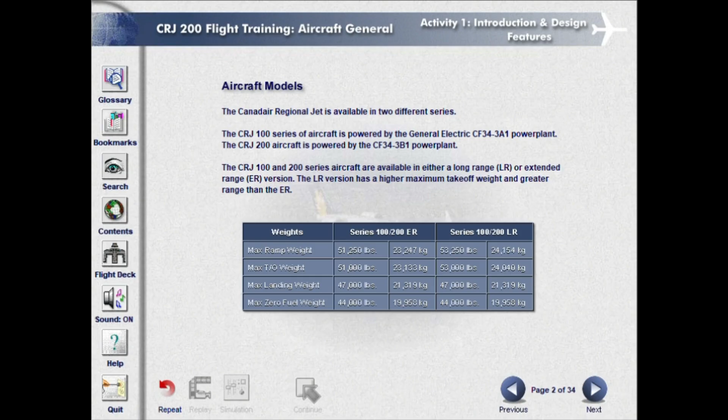Aircraft performance. The CRJ is capable of maintaining a cruise speed of up to 0.81 Mach. The aircraft's maximum operating altitude is 41,000 feet. Maximum operating range is specific to the aircraft model. For example, the 200 LR aircraft with 50 passengers on board is capable of ranges up to 2,005 nautical miles (nm) when flown at a normal cruise speed of 0.74 Mach. The 200 ER aircraft, when operated under identical conditions, has a range of 1,645 nautical miles.

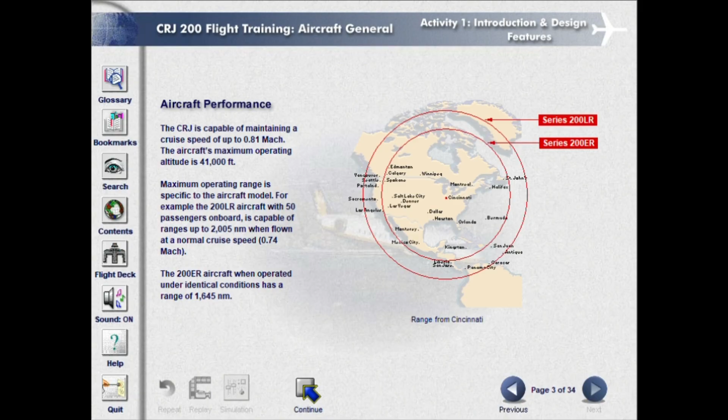Noise and exhaust levels. The Canadair Regional Jet easily meets the most stringent of the FAA's rating system for aircraft noise as defined by FAR Part 36 Stage 3 requirements. Exceptionally quiet during takeoff and landing, the CRJ has allowed a number of airlines to extend their operating hours at some airports. The engines are highly efficient and clean burning, which leads to very low exhaust emissions and lower fuel consumption.

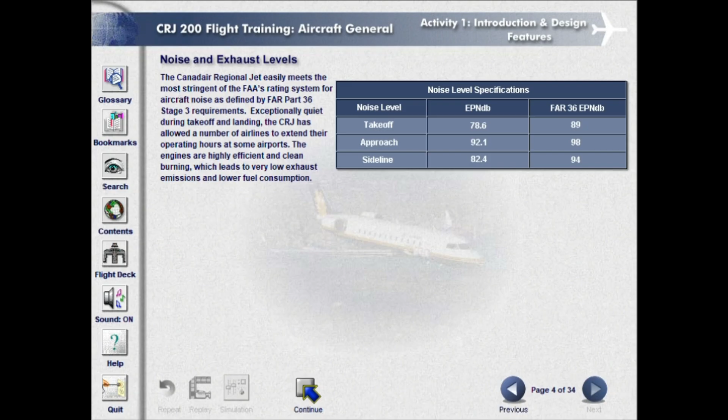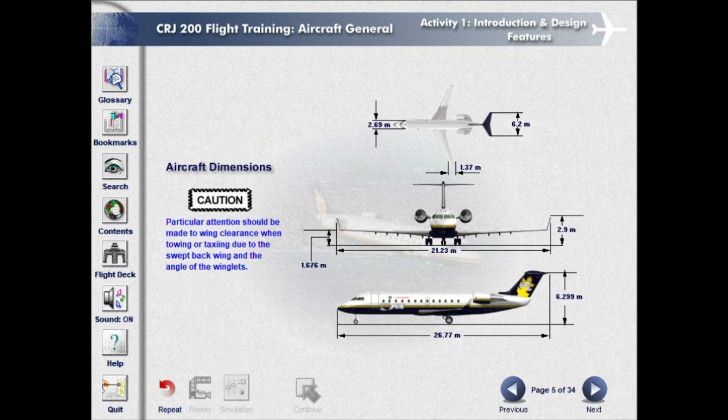Aircraft construction. Many different types of material are used in the construction of the Canadair Regional Jet. While still considered an all-metal aircraft, composite materials play an important role in the aircraft construction. High-strength aluminum alloys are used throughout the primary structure. In areas that require exceptional strength, titanium is used. Advanced composite materials, including Kevlar and graphite epoxy, are used extensively in areas such as fairings, servicing doors, and secondary structures.

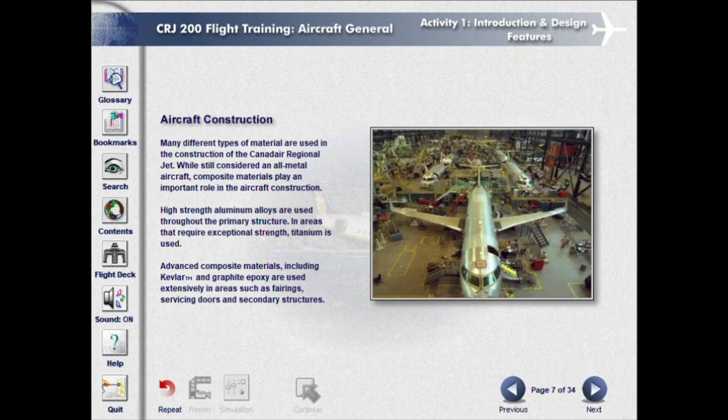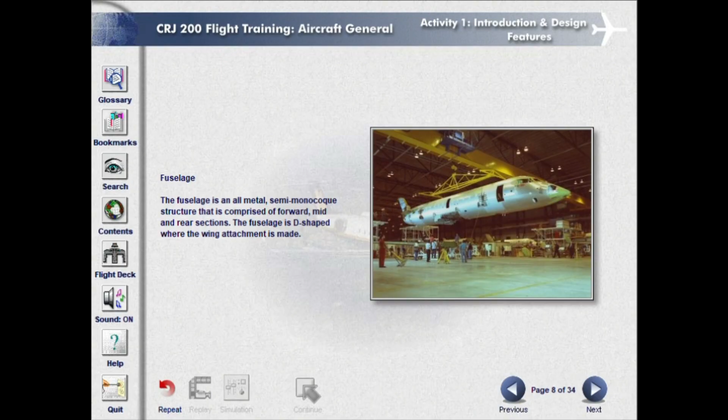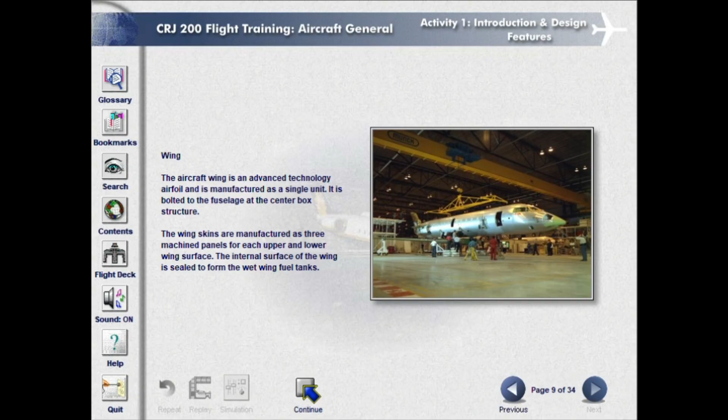Fuselage. The fuselage is an all-metal semi-monocoque structure that is comprised of forward, mid, and rear sections. The fuselage is D-shaped where the wing attachment is made. Wing. The aircraft wing is an advanced technology airfoil and is manufactured as a single unit. It is bolted to the fuselage at the center box structure. The wing skins are manufactured as 3 machined panels for each upper and lower wing surface. The internal surface of the wing is sealed to form the wet wing fuel tanks.

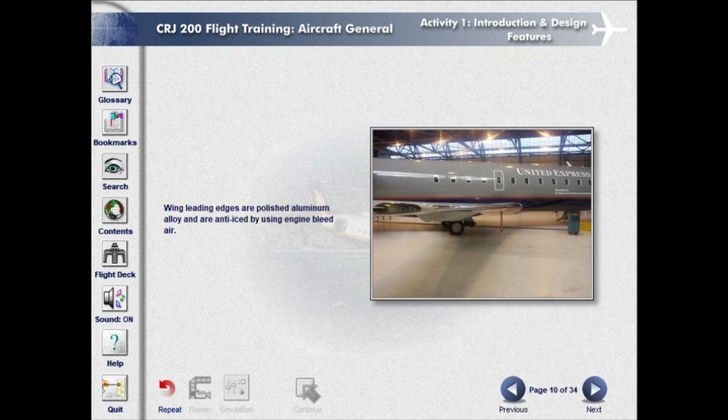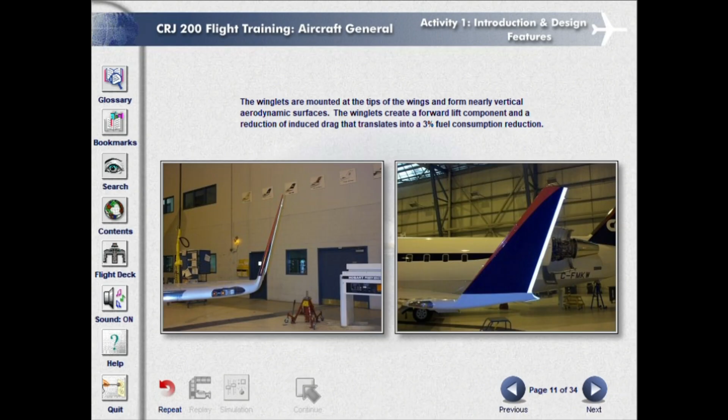Wing leading edges are polished aluminum alloy and are anti-iced by using engine bleed air. The winglets are mounted at the tips of the wings and form nearly vertical aerodynamic surfaces. The winglets create a forward lift component and a reduction of induced drag that translates into a 3% fuel consumption reduction. Empennage. The T-tailed empennage consists of a vertical stabilizer, elevators, rudder, and a fully movable horizontal stabilizer. Leading edges of the swept-back vertical and horizontal stabilizers are constructed of polished aluminum alloy.

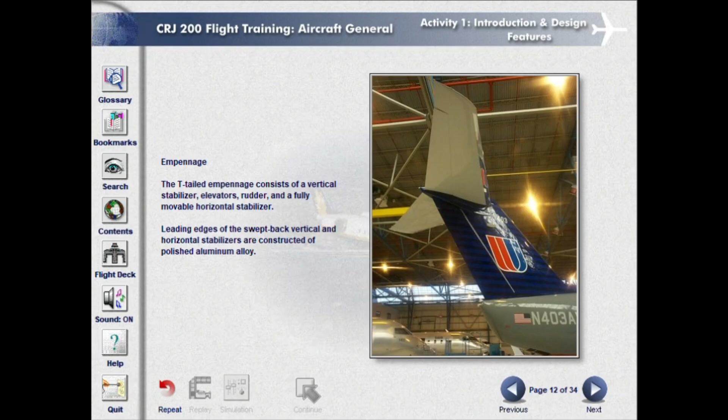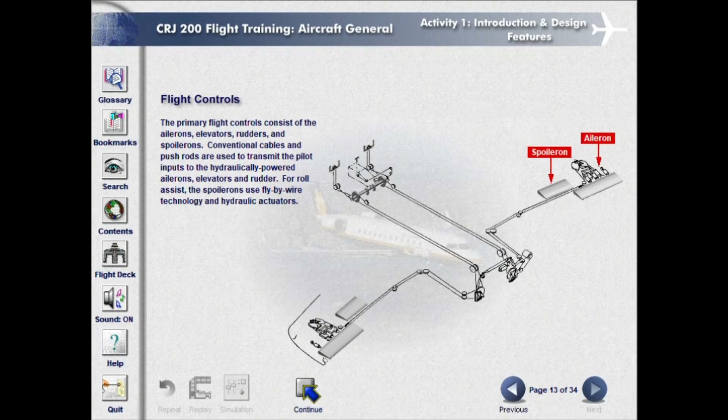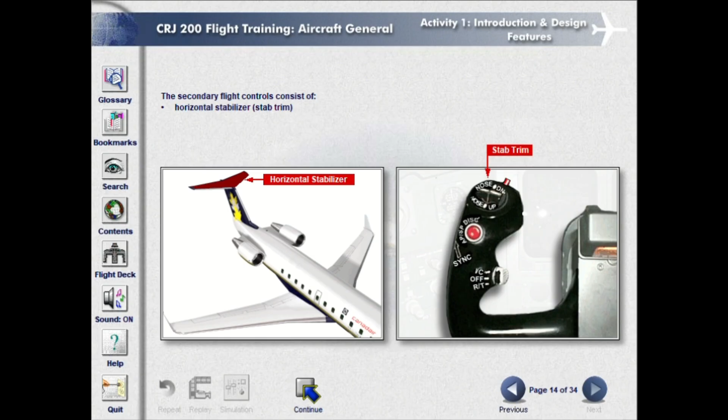Flight controls. The primary flight controls consist of the ailerons, elevators, rudder, and spoilerons. Conventional cables and push rods are used to transmit the pilot inputs to the hydraulically powered ailerons, elevators, and rudder. For roll assist, the spoilerons use fly-by-wire technology and hydraulic actuators. The secondary flight controls consist of horizontal stabilizer trim, aileron and rudder trim, flaps, flight spoilers, and ground spoilers.

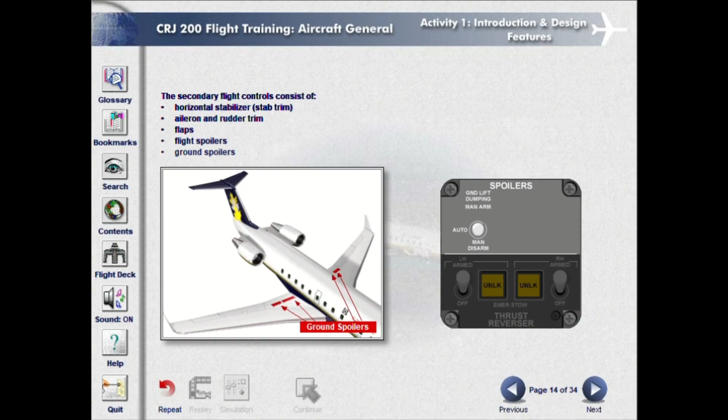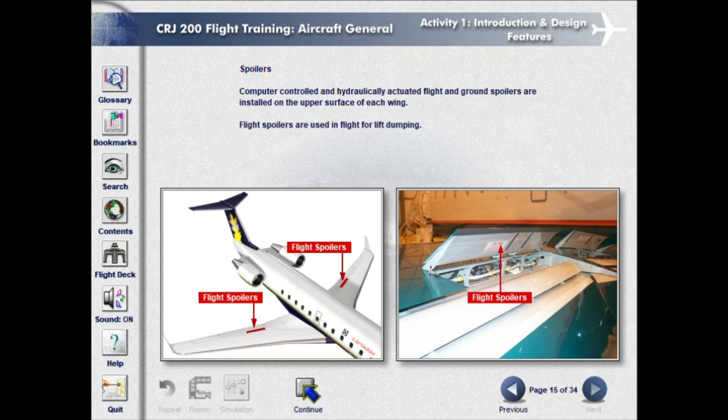Spoilers. Computer-controlled and hydraulically actuated flight and ground spoilers are installed on the upper surface of each wing. Flight spoilers are used in flight for lift dumping. The ground spoilers are major components of the ground lift dumping system. The ground spoilers, flight spoilers, and spoilerons are automatically deployed during a rejected takeoff or on landing to assist in aircraft braking.

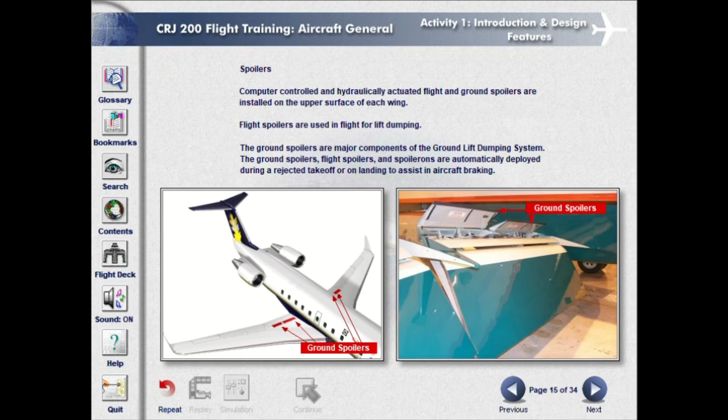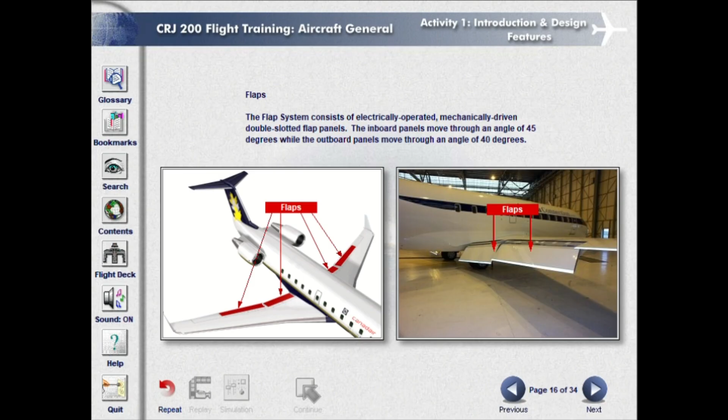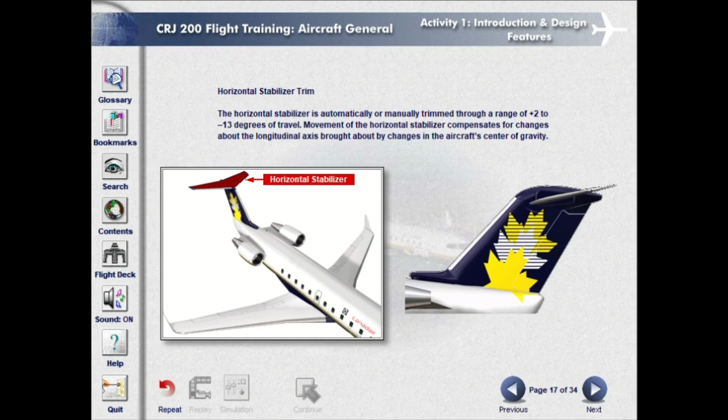Flaps. The flap system consists of electrically operated, mechanically driven, double-slotted flap panels. The inboard panels move through an angle of 45 degrees, while the outboard panels move through an angle of 40 degrees. Horizontal stabilizer trim. The horizontal stabilizer is automatically or manually trimmed through a range of +2 to -13 degrees of travel. Movement of the horizontal stabilizer compensates for changes about the longitudinal axis brought about by changes in the aircraft's center of gravity. Aileron and rudder trim. To change the neutral position of the control surfaces, electrical motors reposition the aileron or rudder control cables.

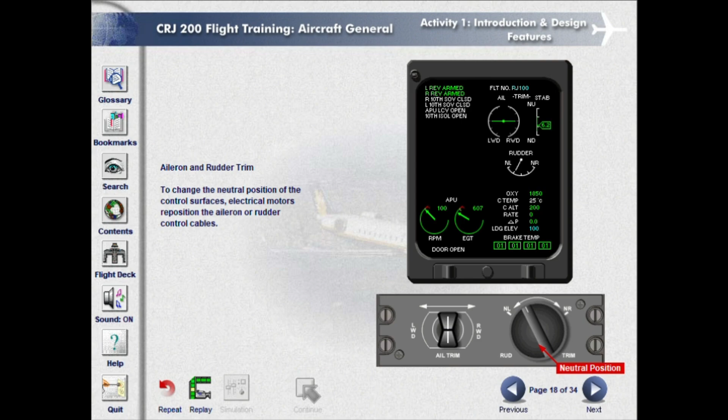Landing gear. The landing gear is electronically controlled and hydraulically actuated. Main landing gear, or MLG. The dual-wheel main landing gear is a trailing link style of gear with nitrogen-charged shock struts. Hydraulic actuators are used to extend and retract the main landing gear.

The gear retracts inward into the main gear bays. When retracted, the wheels are enclosed inside a protective wheel bin and sealed by an aerodynamic brush seal. Each main gear is equipped with temperature-monitored and anti-skid protected steel brakes.

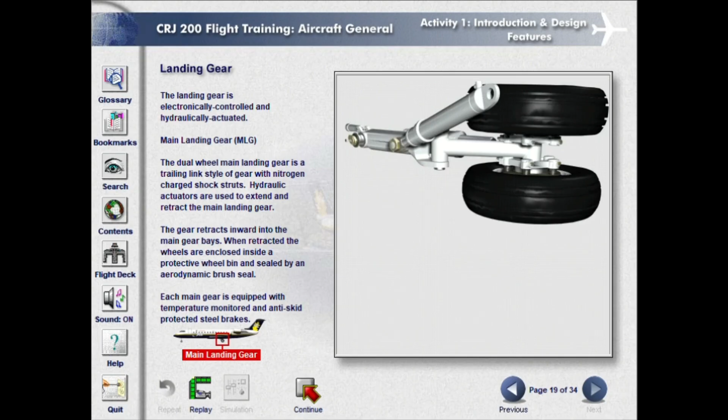Nose landing gear. The nose landing gear is a dual-wheeled assembly with an over-centering downlock and conventional shock strut. The nose gear retracts forward into the nose gear bay. When retracted, the gear is fully enclosed by a pair of hydraulically operated doors.

Nose wheel steering uses steer-by-wire technology. Steering tiller or rudder pedal inputs generate electrical signals to hydraulically turn the nose wheels.

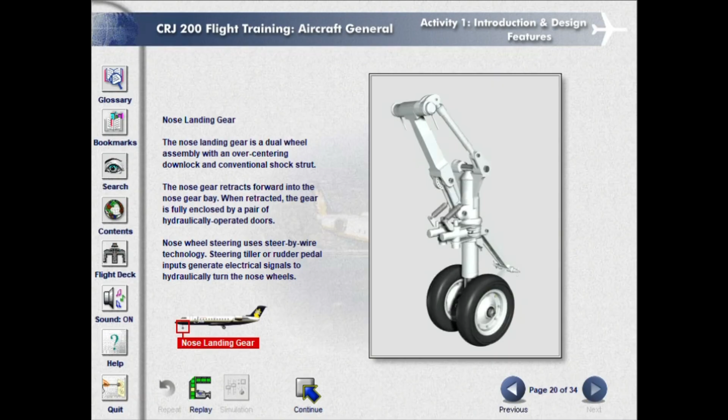CF-34 power plant. The aircraft is equipped with two fuselage-mounted General Electric CF-34-3A1 or 3B1 high-bypass turbofan engines. The CF-34-3A1 and 3B1 engines are identical in appearance and operation. The 3B1 model has been modified internally to provide better flat-rated power availability and lower fuel consumption.

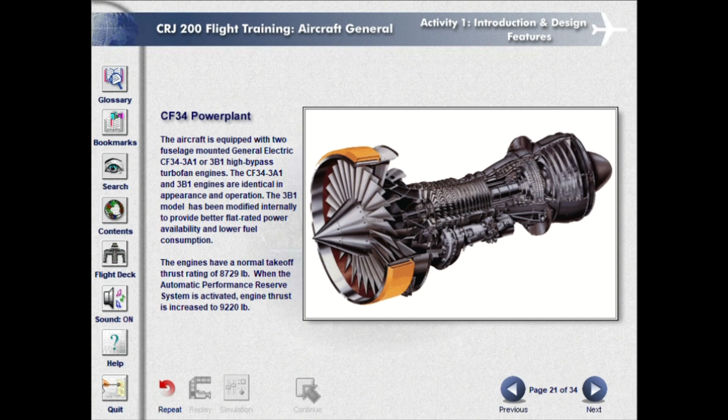The engines have a normal takeoff thrust rating of 8,729 pounds. When the automatic performance reserve system is activated, engine thrust is increased to 9,220 pounds. Lightweight clamshell cowlings provide maintenance personnel with quick and easy access to the engine.

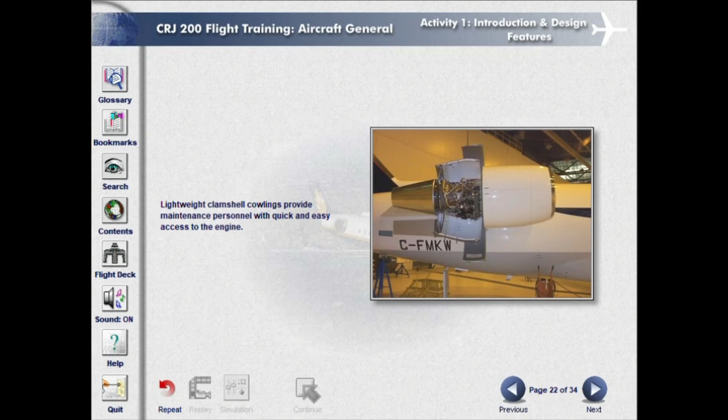Engine major assemblies. The CF-34 power plant is comprised of the N1 and N2 sections. The N1 section consists of a single-stage fan and is driven by a 4-stage low-pressure turbine assembly. The N1 fan generates 80% of the thrust at takeoff. Fan discharge air can be reversed during an aborted takeoff or on landing to assist in stopping.

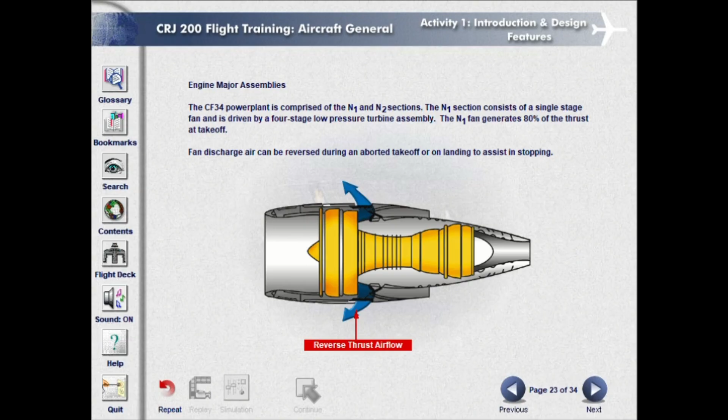Engine services. In addition to producing thrust, the engines provide AC electrical power, bleed air, and hydraulic power to operate various aircraft systems. A 30 kVA AC generator and a mechanically driven hydraulic pump are mounted on the accessory gearbox of each engine. 10th and 14th stage compressor bleed air is used to power pneumatically operated systems.

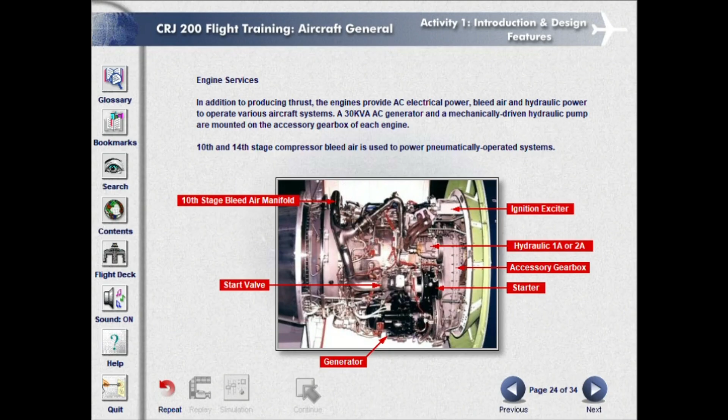Ground handling servicing points. The location of the ramp servicing points permits quick aircraft turnaround. Most of the service locations are on the right side of the aircraft. This configuration allows boarding and deplaning of passengers while servicing is carried out.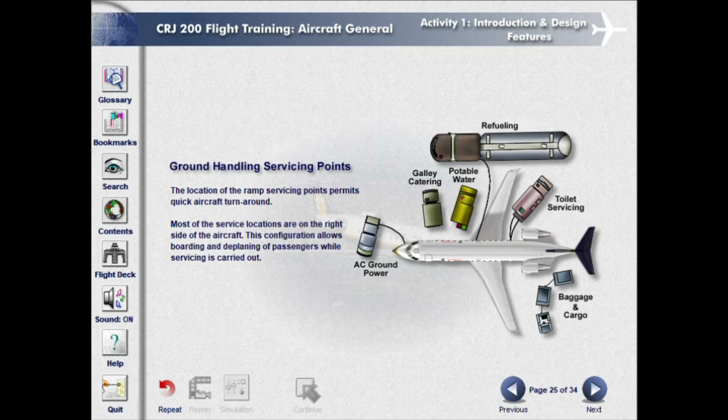Aircraft servicing panels and hatches. Various panels and hatches provide easy access to the equipment located in externally accessed compartments. Unpressurized fuselage compartments include the aft equipment bay and the forward nose compartment. Additional electronic equipment is housed in the pressurized and ventilated avionics bay located beneath the fuselage floor.

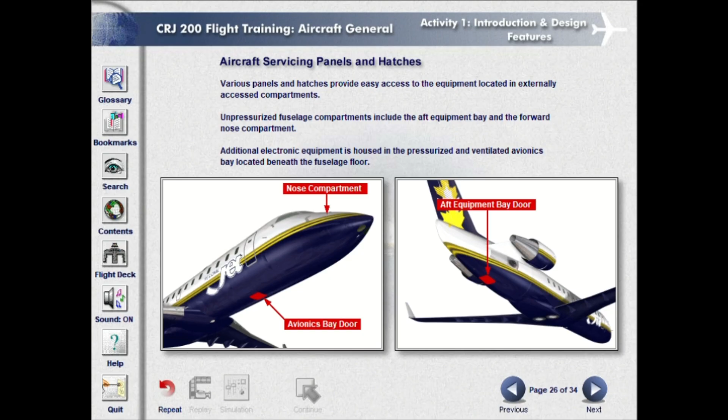Maintenance servicing points. Maintenance service points are also located in easily accessible locations. Maintenance servicing points are located at external fuselage panels, nose area, and aft equipment bay.

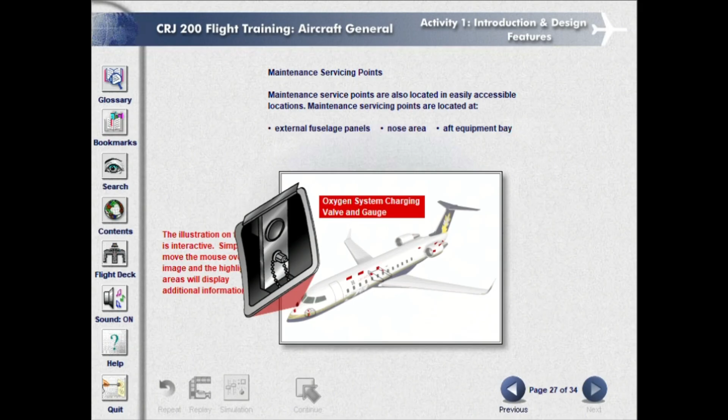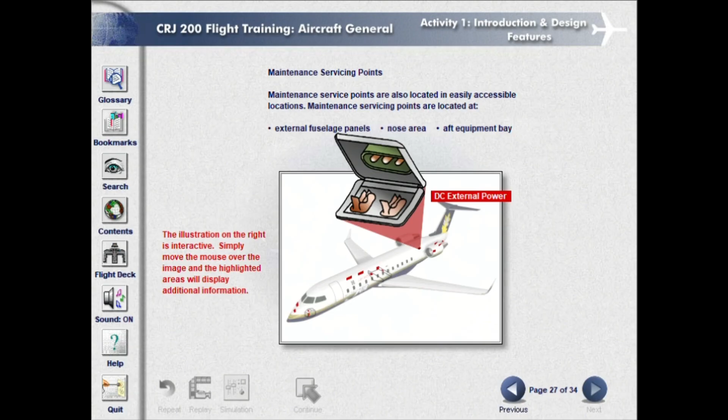Doors and emergency exits. The passenger door is the main entrance exit for passengers and crew. A service door is provided at the galley for loading and unloading of passenger meals and serving equipment. For emergency ground evacuation, the CRJ has 5 emergency exits.

They are passenger door, service door, overhead escape hatch, left overwing emergency exit, right overwing emergency exit. All hatches and doors can be opened from either inside or outside the aircraft.

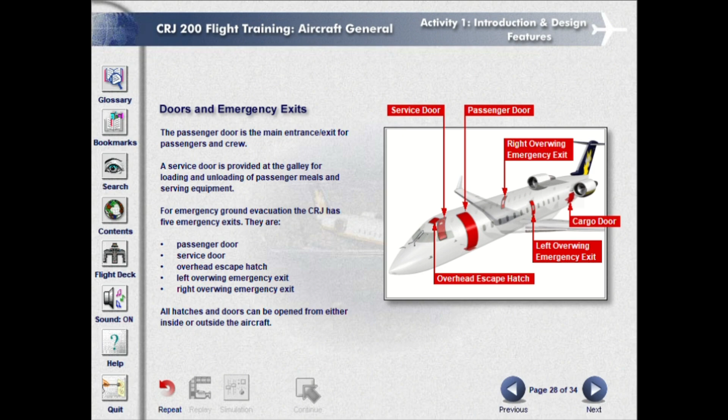Passenger door. The passenger door incorporates integral stairs and folding handrails. It is counterbalanced for ease of manual operation. The door can be raised electrically to the closed position.

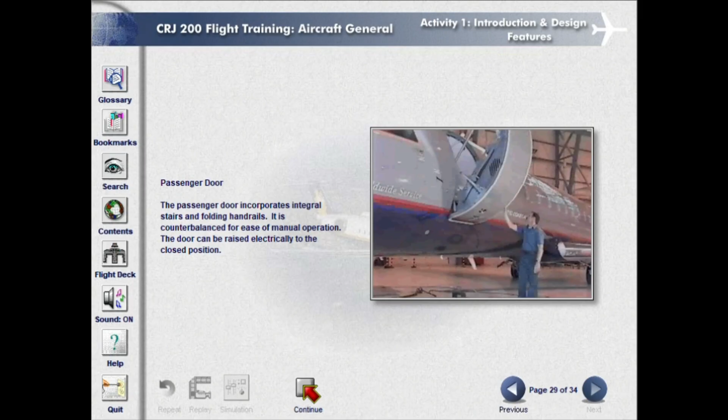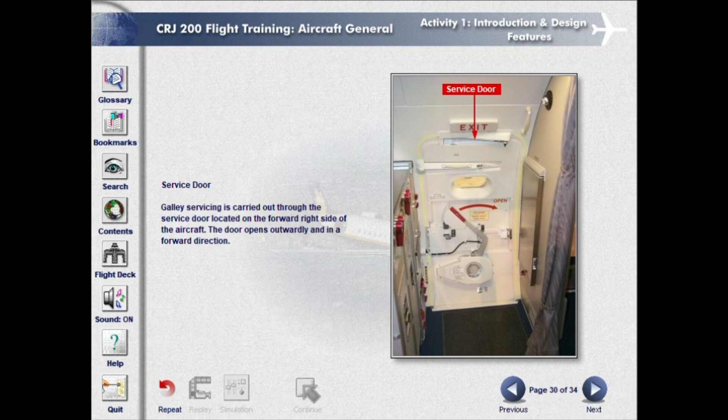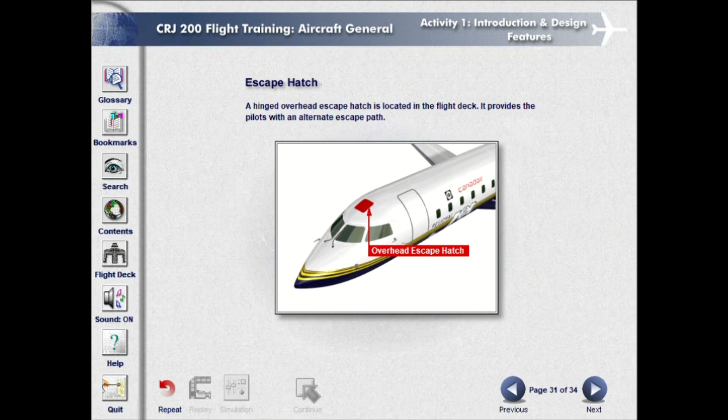Service door. Galley servicing is carried out through the service door, located on the forward right side of the aircraft. The door opens outwardly and in a forward direction. Escape hatch. A hinged overhead escape hatch is located in the flight deck. It provides the pilots with an alternate escape path. Overwing emergency exits. 2 overwing emergency exits are provided for passenger evacuation.

Cargo compartment. A ventilated Class C cargo compartment is located behind the passenger cabin. Optional air conditioning is available. 2 smoke detectors and a fire extinguishing system protect the cargo compartment. The compartment can accommodate up to 3,500 pounds, 1,590 kilograms, of cargo. The compartment can be accessed through an external door.